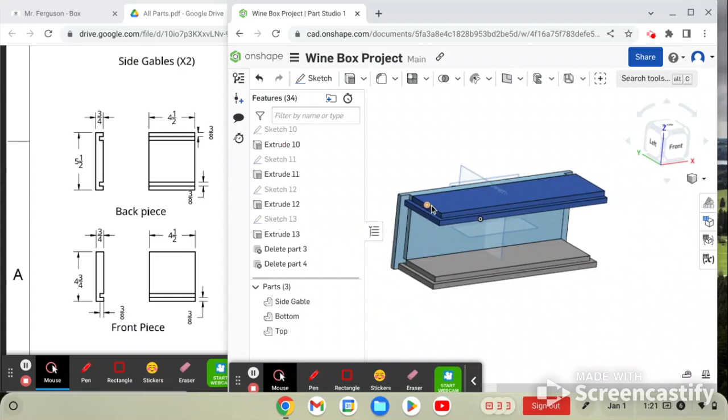Now we are on to building the back piece and front piece. They're going to be built very similarly to the top and bottom, but obviously they will be different dimensions.

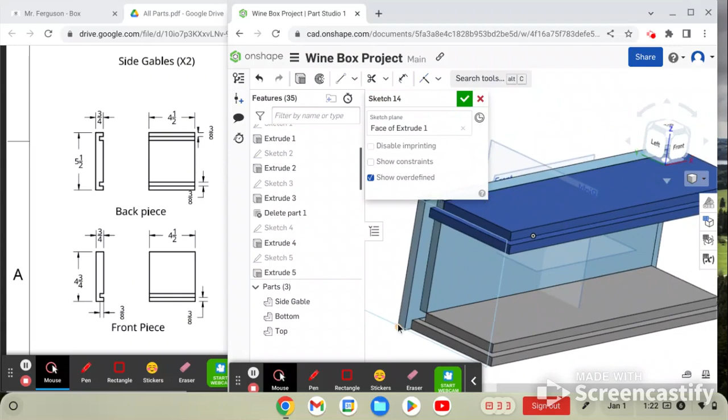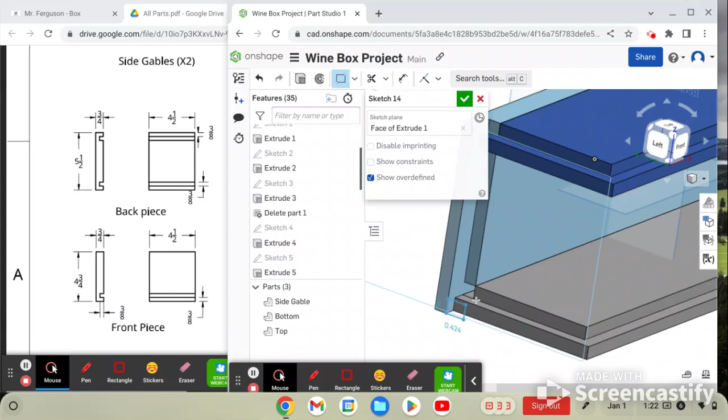So to start off, we can hit sketch for our back. We will be doing it on the left of our project here. So we hit sketch, it needs a plane. We're going to select this outside plane of the side gable. So I'm going to click there, and this is a very important step to make sure we build our piece in the right spot. We do not want to build it on the corner of this piece because that will combine the two pieces, and that will mess up the drawing. So we're going to click on the inside of this piece and draw our rectangle from there. So I'll click that corner. You'll see that it pops up like this. I'll just open it up anywhere there.

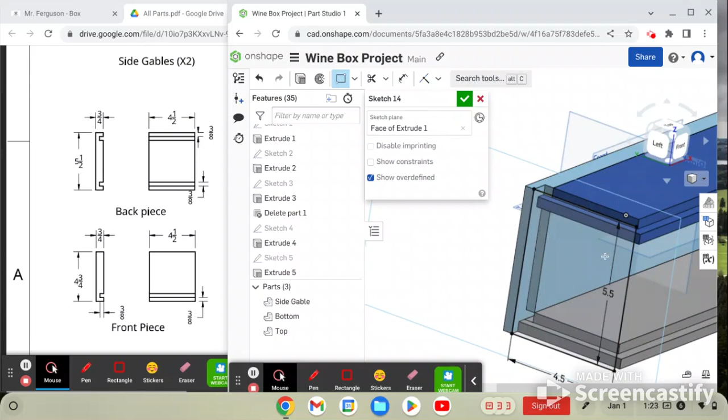So our width will be 4.5 for our back piece. Hover over that, 4.5. And then for our height, it'll be 5.5. So that's our shelf, that's our two-dimensional drawing of it. We're going to go straight to extrude, and it's going to want to extrude out. We're going to flip that around, go opposite direction, 3/4, enter, and you'll see that it lines up perfectly with our other piece, our other rabbet right there. So that is exactly what we want.

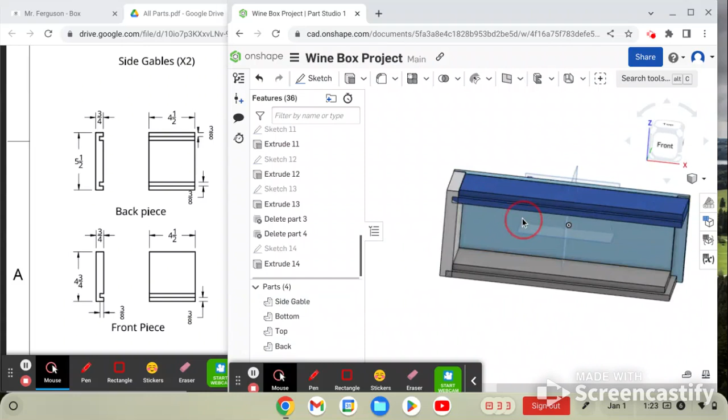I'll click check mark, and that is our back piece. So I'll rename part 4 to back. Now that we have that, I'm going to just hide everything else. I'm going to make sure I'm looking at it like this. I'm going to hide side gable, bottom, and top. And then the part we want to draw the new sketch on is the part facing the inside of the box. So I'm going to click on that face, sketch, and now we have it selected for our new sketch.

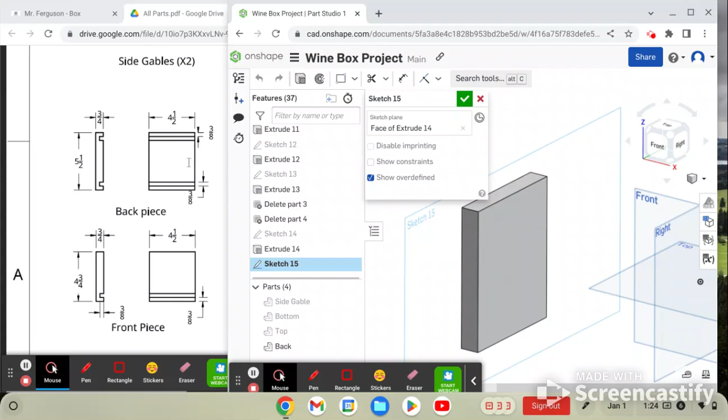If you take a look at the back piece on the side here on our plans, all we're doing is creating 4 3/8 of an inch rectangles. So 2 for the top, 2 for the bottom. I'll go corner rectangle. I can even look at it from the right here and make sure I have it all in my window. I'm going to go to the corner, 3/8. Perfect. And then another one, 3/8. And we can do the same for the bottom.

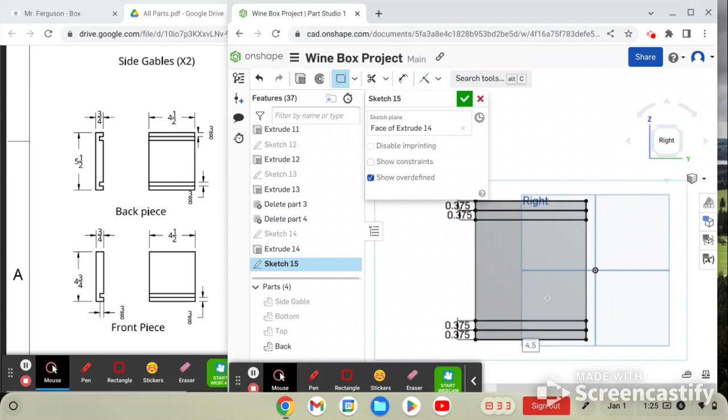So we're not changing the 4.5. We're just going to that line and hovering over the new measurement, or the height of it, 3/8 of an inch. That is looking like our back piece right there. So that is good, we can hit check mark.

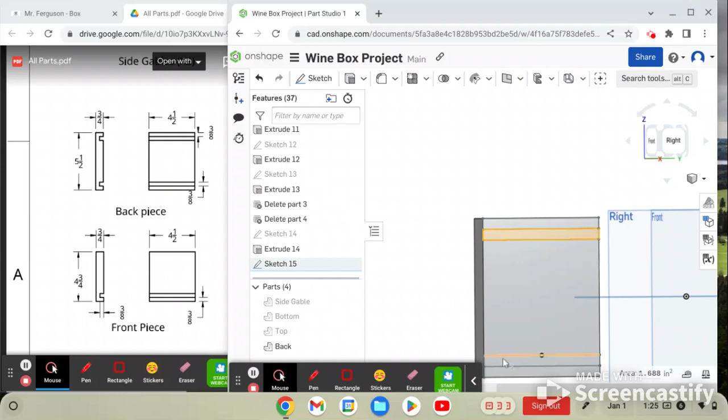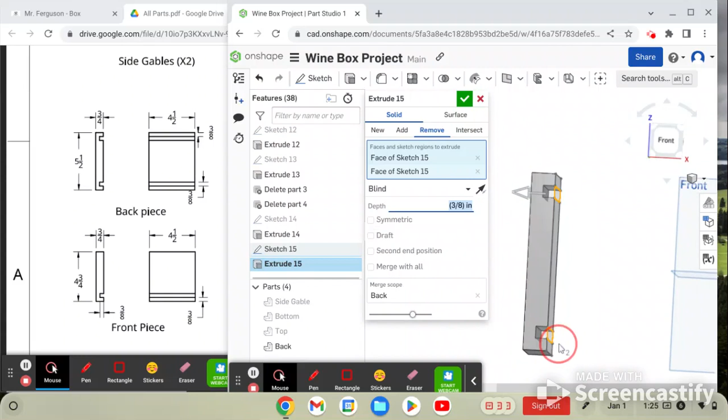And now you can see we can select the 2 parts we want to remove. If we take a look at our side, we want to remove these parts right here. So I have that selected, and you just need to click the other part and it'll select it as well. That will be the extrude command. Again, it's going to want to go out, we will change that from add to remove. Go change the 1 inch to 3/8. And just like that, we have our pieces removed for the grooves that we need to build our box with.

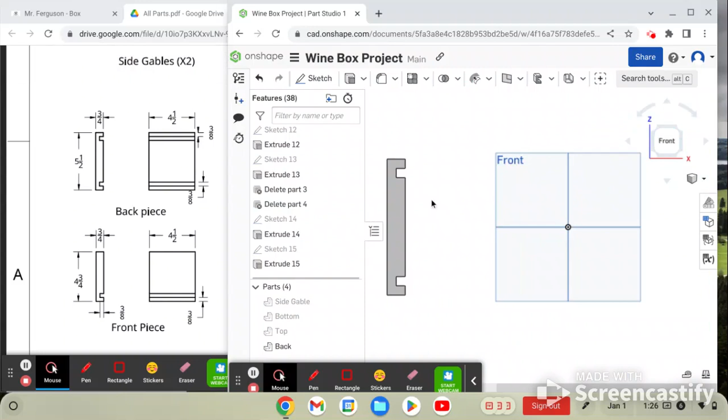So there is everything we need. Click check mark, and we can confirm by going to the front that it is identical to our back piece on our plan. Same thing with our right view, it is the same there. So let's go back to our front, and we will unhide these. So that is what it's going to look like. Everything's lining up, that's good. And now we will move on to the front piece.

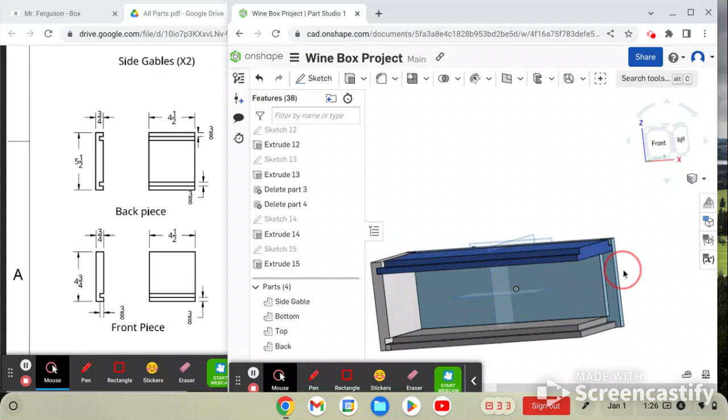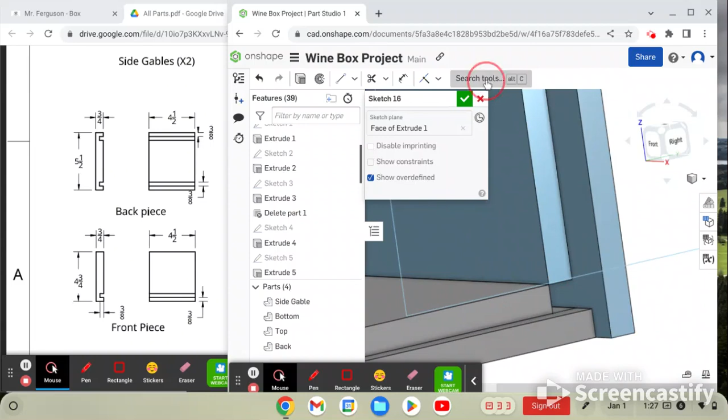Again, very similar to the back, but we're going to have different measurements because the top lid needs to slide over the front piece, instead of butting into this piece, it's going to slide over the front. So I'm going to go create a new sketch right now, and I'm going to select again the same plane, but on the other side of the gable. So I click that plane, remembering not to go create the rectangle from the outside here, but going from the inside. So I have my corner rectangle inside, and you will see that you can even build it or create the rectangle to the already specified parts here.

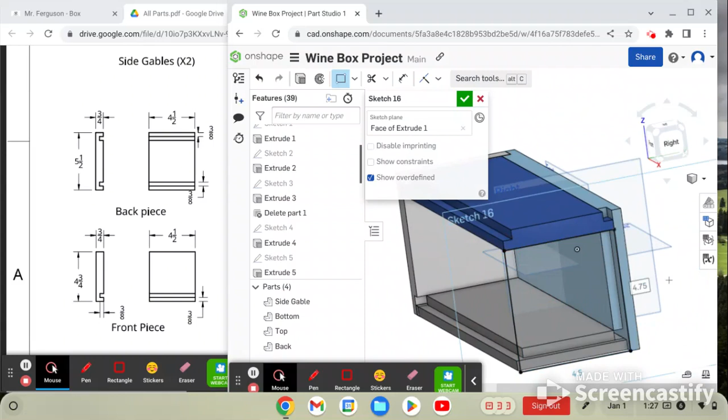So for example, I'll just do it differently this time from the last one. I'll just snap onto this one, and you'll see that I can click it. So we have 4 3/4 high, which is 4.75. We'll look at our plan, that is perfect, 4 3/4. And then for our width, we have 4.5. And exactly like our plan says, 4.5. So everything is good there.

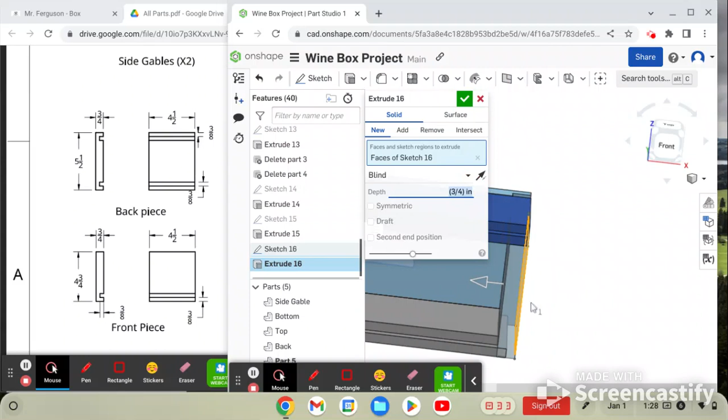We can go directly to extrude. It's going to want to push it out, we'll do the opposite way. That's 3/4 of an inch, so 3/4. And everything looks good there now. So I'm going to hit OK. Again, I will rename this part 5 to front.

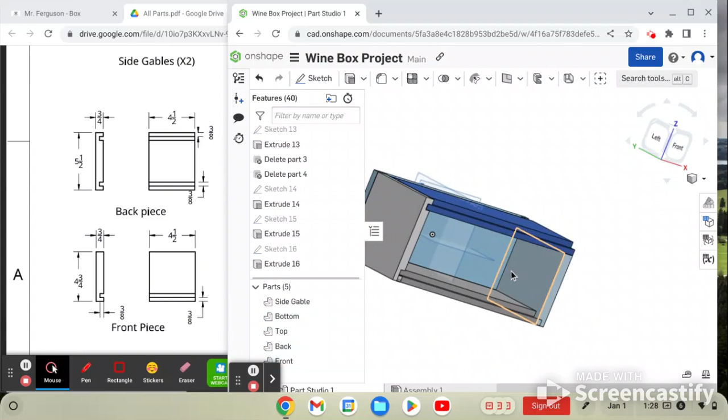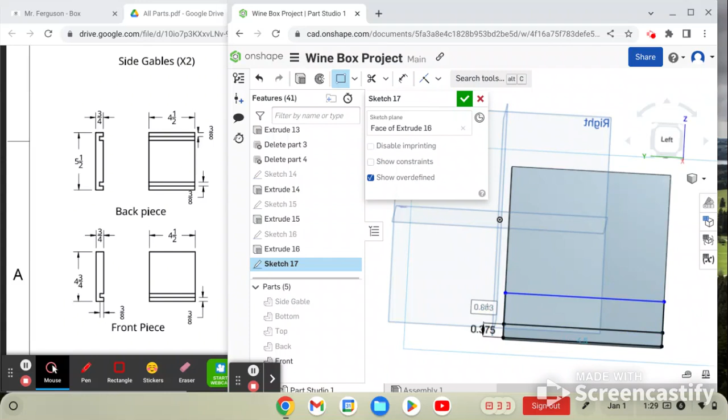And we can go ahead and start to mark out our grooves on the front. So I will hide these, hide the side, bottom, top, even the back, so I know this is where I want to sketch on. I'm going to click it, sketch, and we now can use, I'll just go to the left view to make sure we're on the right part, which we are. So we're still on the sketch. I can go corner rectangle. Now we're only making the bottom 2 parts of it and not the top because, like I said earlier, the lid is sliding over that top part. So I'm going to go corner rectangle 3/8 and then 3/8 again for this part. And that is what we want, so you can click OK.

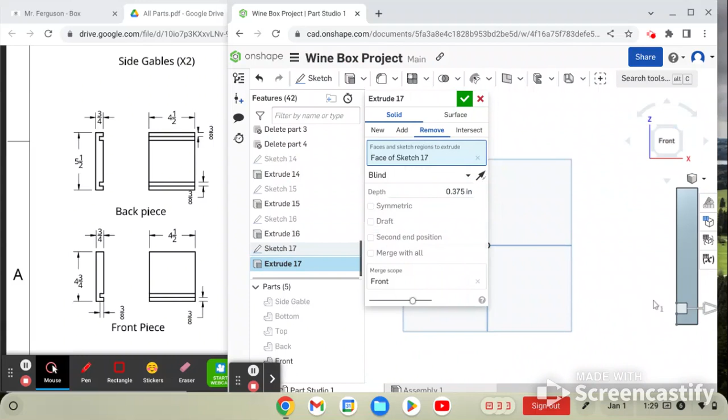Same thing as the back piece, select that middle, extrude, pushing it out. We're going to not add, but remove, 3/8. And just like that, we can double check that this is the same as our front piece. So everything looks good there.

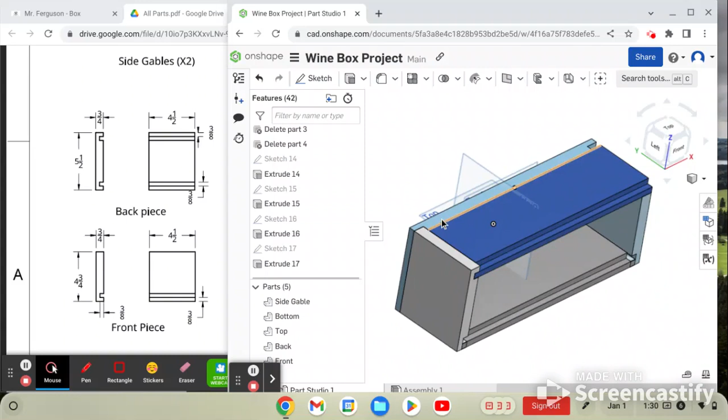So we can go ahead and unhide the rest of them again. As you can see, there's our box. We are missing the other side gable, but don't worry about that, because when we go to assemble it, we'll bring in 2 pieces.